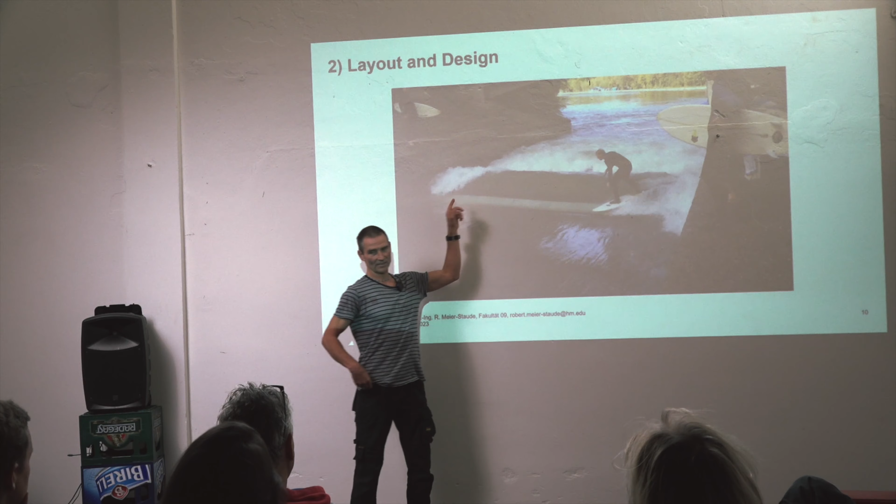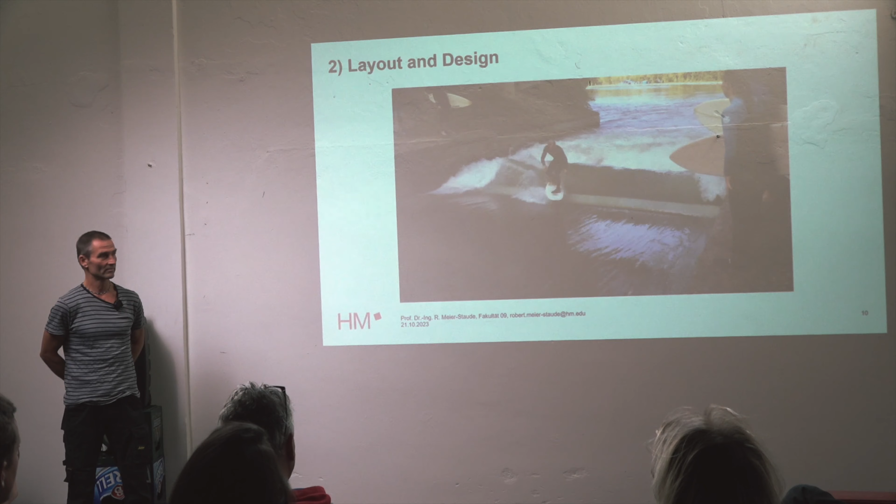And then the wave broke down, and that's where we came in and thought about what can we do, and we just put some plastic lamellas here into the channel, and then, if everything is okay, we have a perfect wave. And if some parameters are not okay, we have no wave.

And the second special thing is that first we did the analysis with simulation. So someone asked me today if I do wave science, and I say no, I don't do wave science. But we really did a lot of analysis work before we said this is a very simple but working installation to reinstall the wave. And so we gained some understanding of how it works and what are the main parameters.

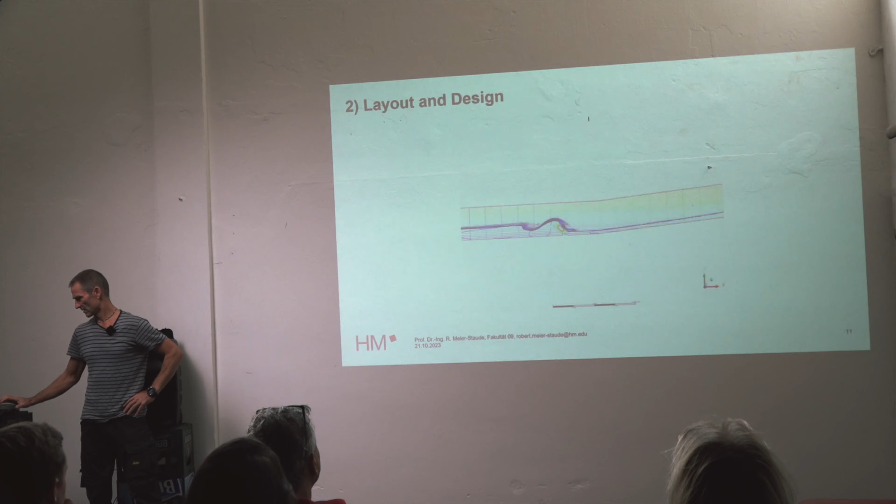And now we can watch a simulation we did before we built the lamella system, the installation. It's just running. Okay.

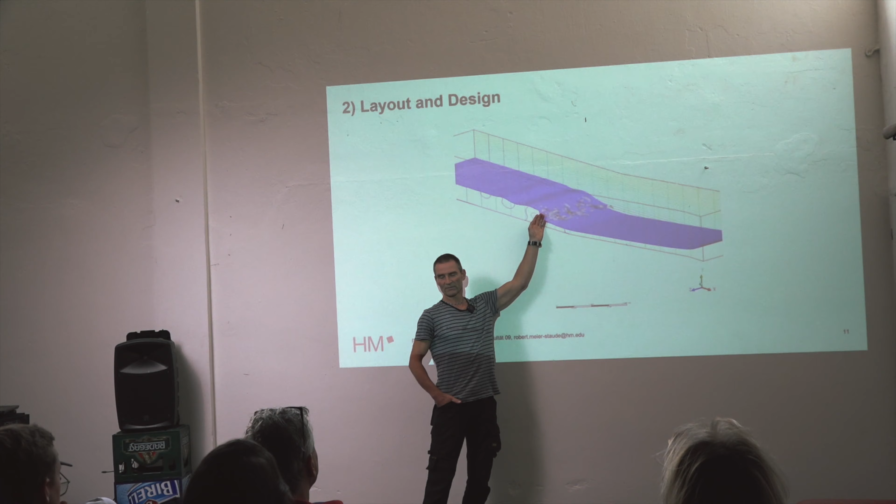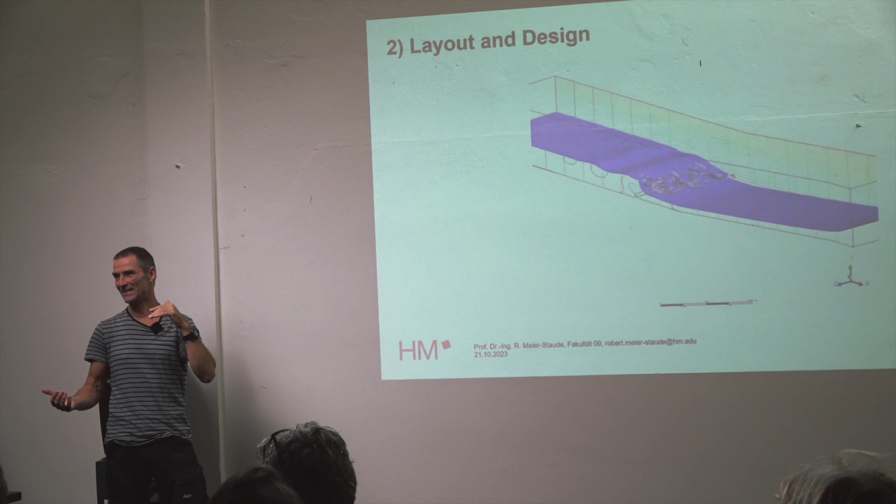What changes from the perfect wave we've seen a few seconds ago to this picture? Most of us have seen it today, and some of us may have asked themselves, why did the wave break down? And then the guy went to the needles from the needle weir, and he just did a little magic thing. Maybe a few liters per second more went down the river, and then the wave stood up again.

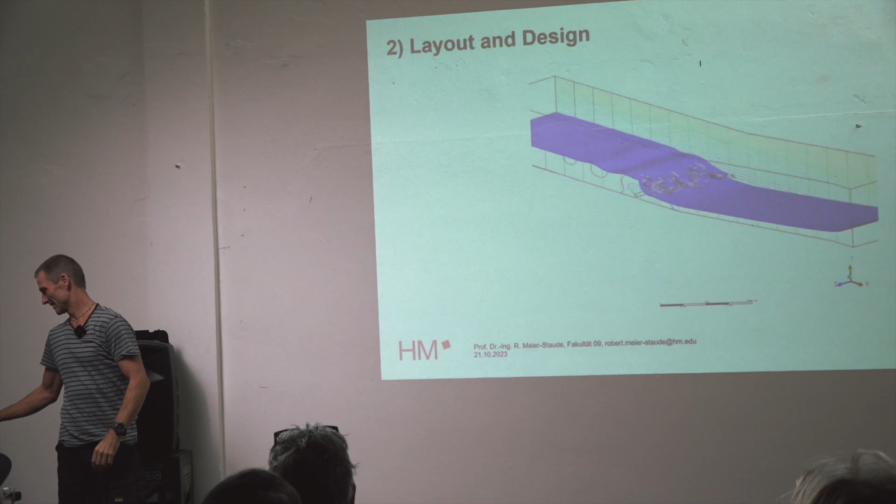Yeah, and this is so magic, and it's only because the downstream water level changes for maybe a few millimeters, maybe 1 centimeter, and this is the difference between the perfect wave and no wave, and nothing else changes.

Okay, then we see this yellow area here, and I have some ISO lines here in the symmetry plane. So what I didn't mention is, on the right side there is the wall of the channel. On the left side there's just a symmetry plane where we have a symmetric half of the wave. So I don't need so much calculation power.

We see some boundary effects here at the wall. That's what we see in reality too. And then we see the perfect wave. And the yellow isosurface shows us what I called in 2015 the Y impulse. So this is the vertical momentum of the flow. And in fact, it's not the vertical momentum, it's the vertical momentum flow.

And this is the physical property of pressure. This is Pascal. And this is just the part of the wave which we surf. And a good wave, like we have it here, a strong wave, has a big, wide sweet spot. So the yellow area will be big, and then we have a wave where we can do a lot of tricks. And it's easy to surf, in fact, if you are used to it.